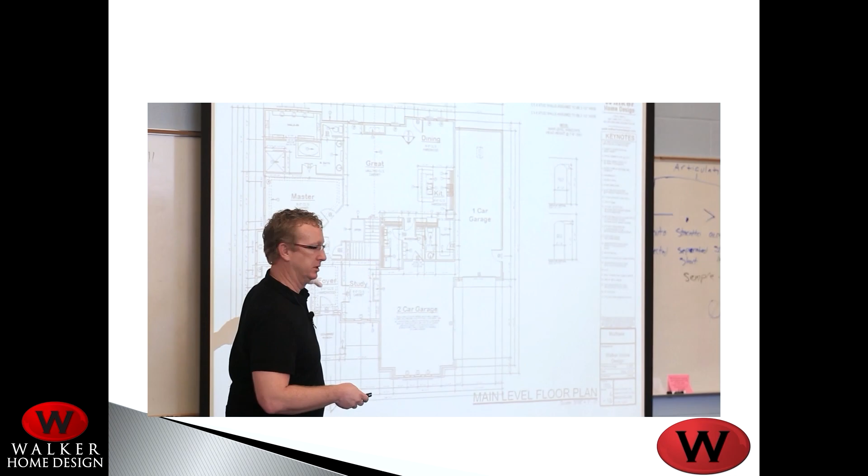That's a video of some of the homes we've done recently, different styles, different types, different locations, cities. You saw a few shots of me out there on job sites talking with subcontractors and builders. We're going to talk a little bit more about that in a moment.

Here's a little history. Sometimes people want to know where you came from, what your background is, what qualifies you to draw their $10 million house. So here's just a few statistics about our company, a little bit about myself. I designed over 4,000 homes, remodels, multifamily projects in almost 30 years of doing this professionally.

Our company, we try to be pretty picky about who we hire, so we've won tons of awards because we hire great people. If you're looking for a spot to work and you want to be with a cool team, we've won tons of awards. Here in Utah, we've won 9 Best of State, and 3 out of the last 4 years we've won Best of Salt Lake City, Best Architect, Best Interiors, People's Choice in the Parade of Homes, those kind of things.

Something else unique is I'm a homeowner and I've built my own homes that I live in. I've also grown up building homes with my dad and my grandpa. My grandpa started building homes back in the 1940s. I've developed land, taken horse property, turned it into 3-lot subdivisions, and learned a lot from that experience. And you can see some of the other things on there.

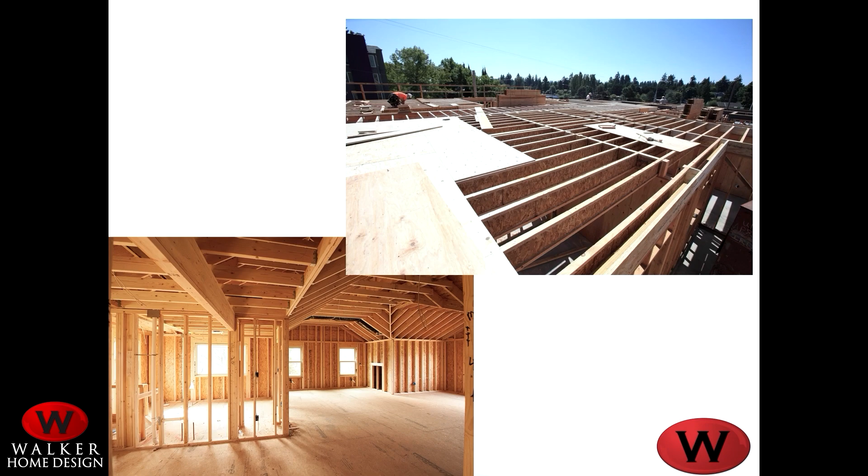So once I started my company, I said I've learned a lot by being out on job sites, so I would like to take my team out to job sites. We go out to job sites during framing, sometimes at the 4-way inspection, that's when the plumber, the electrician, the HVAC guys have all finished their work. We go back and see the guts of a house and how it all comes together.

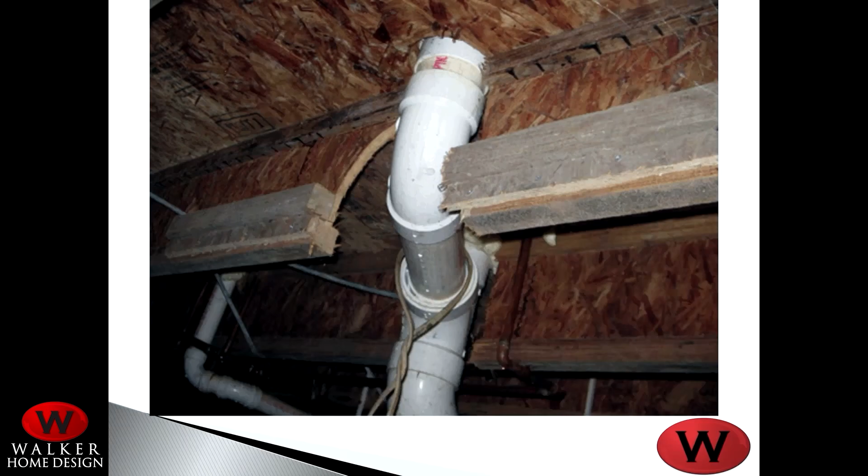And something we started noticing as we interviewed different trades was that this was one of the problems happening all the time: the framer leaves, the plumber comes in and he's setting tubs and toilets and showers, and he drills through a floor joist and he drills through a beam, and somebody's got to pay for that.

When the builder would go to the plumber and get mad at him, the plumber would say, well, the homeowner wants the tub or shower right here, so the drain's got to be in this location. So then he'd say, well, I got to blame somebody else, I'm going to go to the framer. He put the beam in the wrong spot. So he'd go to the framer, and the framer would say, well, I'm just laying out the floor joists like the engineer called. You'd see this finger pointing back and forth. Eventually somebody has to pay for it, and it's usually the homeowner, because the builder isn't going to take responsibility, and it becomes a line item on contingency for the homeowner.

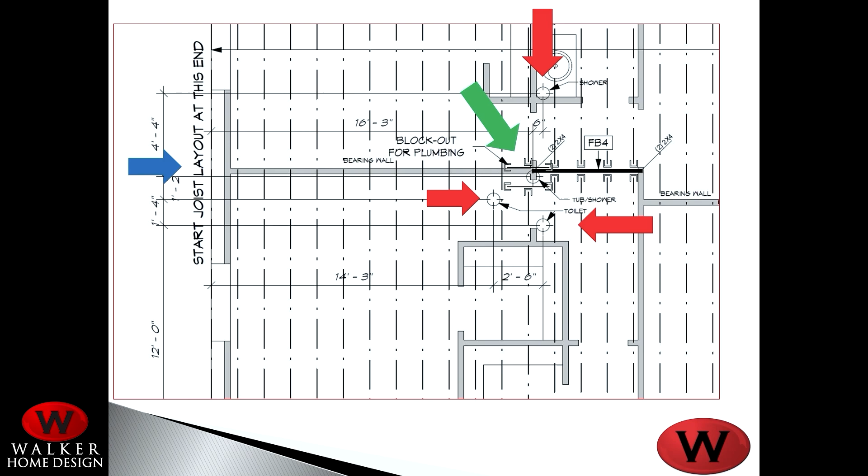Almost like you'd see in directions to build a spaceship with Lego. Builders came back and said this saves them anywhere from $1,000 to $5,000 on bigger homes in time, money, and labor. They said this is one of about 20 to 30 things they see on Walker's plans of thinking ahead, solving problems before they become issues on a job site. And that's why we like using Walker plans.

All right, so that's item number one that we feel like we're really good at Walker Home Design. Item number two is designing better floor plans. The way we do that is we ask a lot of questions. As a client comes into our office, we try not to make assumptions like, oh, you want a 3-car garage, 4 bedrooms, a dining room and a pantry. We ask people how they're going to use their space.

A lot of times I use the term, what's your pain? Usually as humans, we don't make a change in our life unless there's a pain or something's bugging us, and that's true with people that build houses. I'm going to build a new house because I have more kids and need more space, or I'm going to build a new house because I don't have as many kids at home and need a smaller space. Whatever that issue is, we try to find out how they're going to use their new space.

For example, in the garage, we ask our clients, how many cars do you have? What size are they? How much space do you need for storage in the garage? Do you work from home? Do you need a home office? Do clients come into that office? How much time do you spend in your kitchen? Are you a gourmet chef or do you do takeout? If you do cook a lot, how many people are in that kitchen with you, and do you need a bigger pantry? Do you entertain, do you have parties? For every aspect of the house, we go through this question and answer series so we know exactly how they're going to use the space and can get it designed correctly.

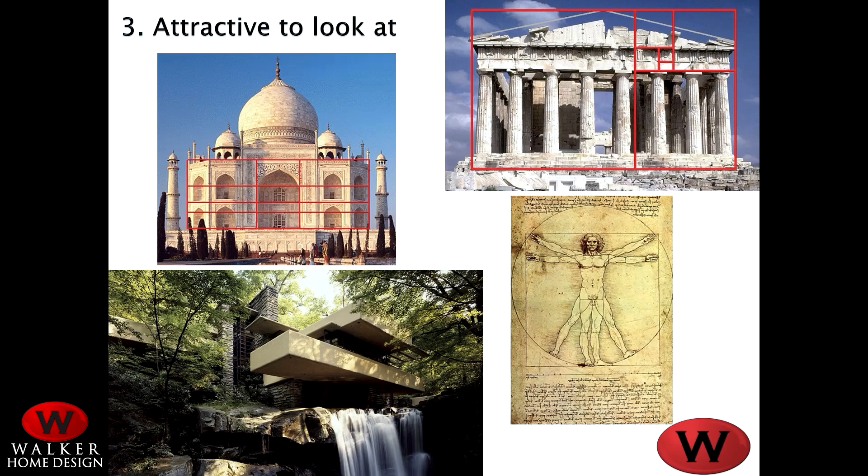You can kind of see it in these red lines on the Parthenon and the Taj Mahal. Frank Lloyd Wright used it in his architecture. You see this picture of Falling Water, which is a pretty famous home he did. It's also in Michelangelo and Leonardo da Vinci's art and their sculptures, all about proportions and ratios. So when we go to design a house, I actually still use grid paper or grid lines to help us design and follow those rules.

The fourth thing that we feel like we're really good at is giving back to our community. We work a lot with different charities. We've donated plans to Habitat for Humanity. Our office has actually built playhouses and donated those to Shriners Hospital. We've done remodel projects for a small charity called Little Miracles that helps single moms with kids remodel or improve their homes. But probably the biggest charity we've worked with over the last 20 to 30 years has been Make-A-Wish.

The way that we partner with them is we may have a home that's coming up to be in a parade of homes or something like that, and we want to do a themed room inside a client's house. So we'll partner with Utah Make-A-Wish and find a child that has already been granted their wish, and we will design a room that looks like their wish, kind of reinvented. During that parade, we'll usually get 8 to 10,000 people that come through, and we'll have a QR code or a donation jar, and we try to get each person that comes through that room to donate $1 back to Make-A-Wish.

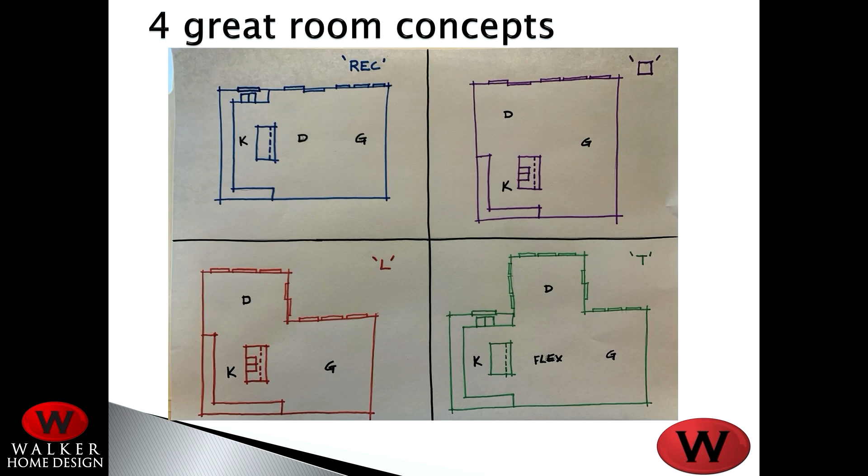So this particular client said, well, yeah, we've got a lot of needs, we want the best of everything. So I said, okay, let's go look at your property and see how this T shape is going to fit and maximize the value of your land.

So we went out to their property and we noticed something right off the bat. First of all, their lot was sloped. The back was high, the front was low, and the left side was high, and the right side was lower. So it not only sloped in one direction, it sloped in two directions on an angle.

The other thing was all of their views were off to one side of the property. So I said, here's something we should consider: what if we took that T shape and rotated it 90 degrees? So instead of your backyard being behind your house, your backyard was off to the side. You can see here highlighted in red is that T shape rotated, so all their windows were off to the right of that picture.

Then we started playing grown-up Tetris. I took the shapes of the other rooms based on the sizes they wanted, and we started mapping out where the rest of those rooms could go. Then I quickly sketched up what the outside could look like based on the photograph they first showed me. So this was our first rough bubble diagram.

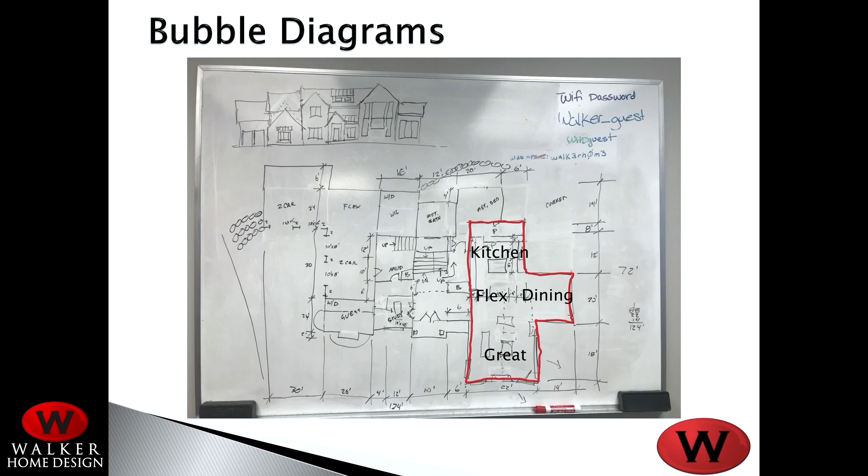The client said, okay, we like how this maps out, but how big is that house compared to our lot size? How does it fit on our property? So at the next meeting, we had their property drawn up. They actually bought two half-acre lots, and they said, we might want to sell this other lot someday, so let's put the house on one side and do all our landscaping on the other side. So that's how we mapped this out.

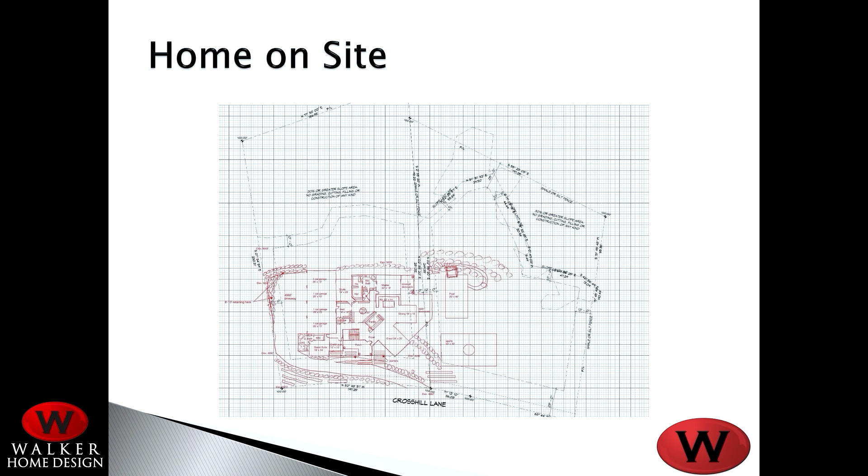Their house fit on one side. I'll do a blow up of it, and we sketched it out. You can see I did grid patterns, which helps me follow my rules of even numbers and the golden section when it comes time to doing the elevation.

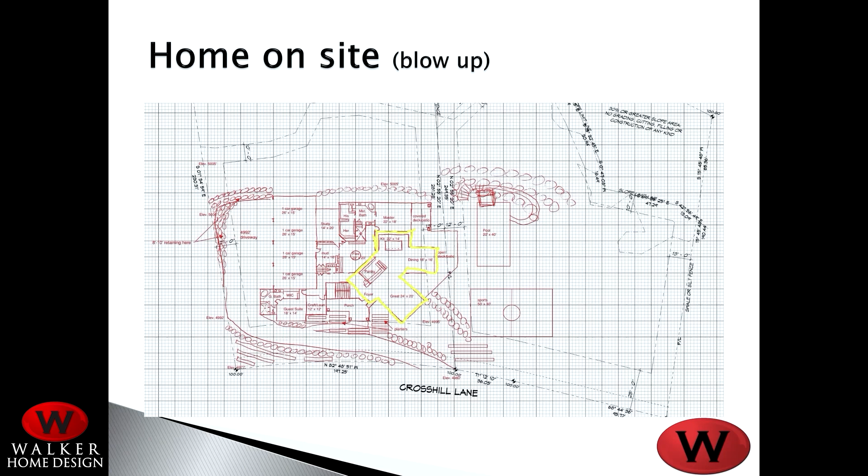Luckily the builder who was in the meeting - we invite the builders to every one of these meetings so they take ownership in this design process - chimed in and said, hey, if you're going to start doing angles like that, you need to add about 25% to your budget. The client said, well, why is that? And they said, well, do you remember how Jamie talked about the materials we use come in certain shapes and sizes? They're usually squares and rectangles and things like that.

Well, when you start doing angles on a house, you're going to start taking those rectangles and slicing triangles off of them. And those triangles aren't going to be able to be used, so they're going to go in the dumpster. So you need to budget about 25% to waste, basically. And they said, well, we'd rather use that money on our swimming pool and our sports court, so let's go back and keep everything squared up.

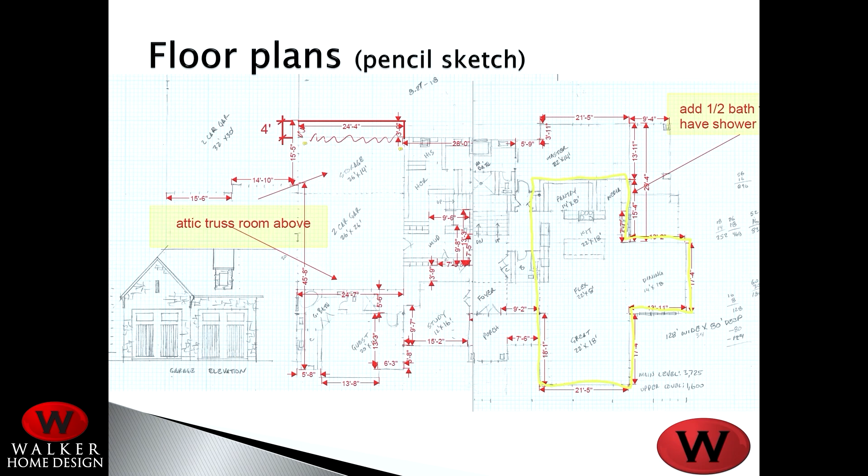So at the following meeting, we went back to the drawing board and restarted the process. You can see highlighted in yellow is that T shape, and then you can see the sizes and shapes of the other rooms. By this time, we had a topographical map that showed the slope of their property, so I was able to resketch the outside of their house to fit that slope.

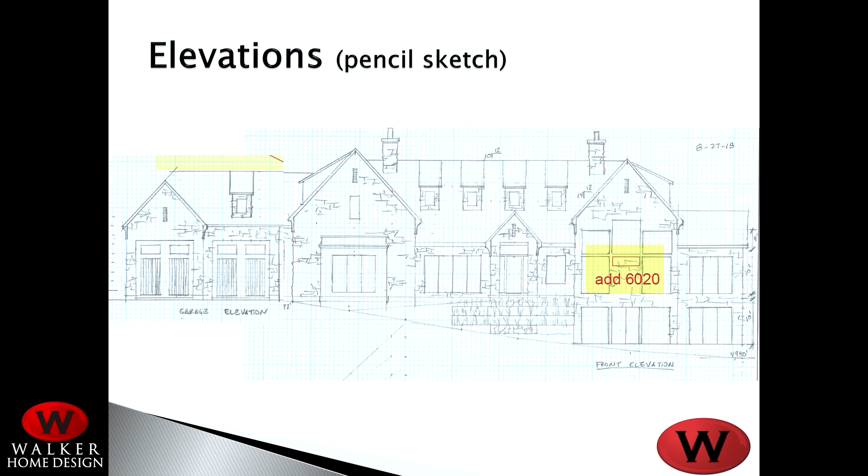Once they saw the floor plan and this elevation, they said, okay, we love this. The builder said it meets budget. Let's go ahead and move forward. So the client said, all right, let's do it.

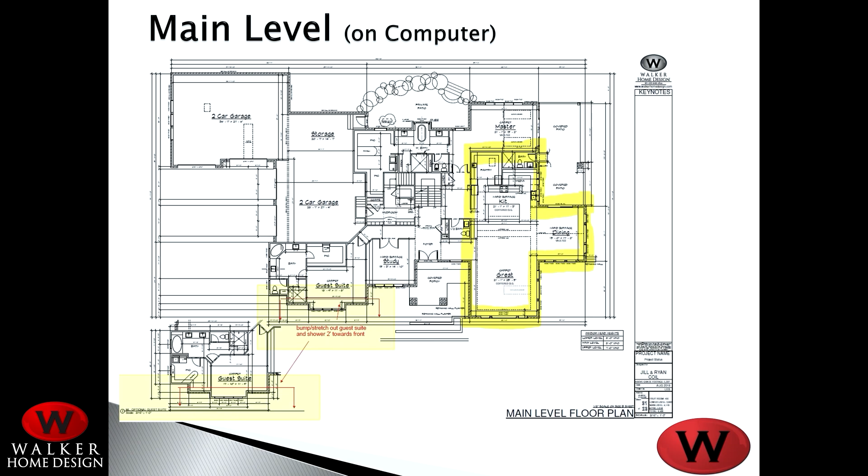So at the next meeting, which typically is a week to two weeks later, we had their floor plans on the computer. You can see I've highlighted the T in yellow, so you can follow that through this journey. They made a few changes to the floor plan. They had a mother-in-law suite, and they went back and forth on different designs we wanted to do for that. We also did their upstairs - they had an attic room over the garage. They didn't make a lot of changes to that.

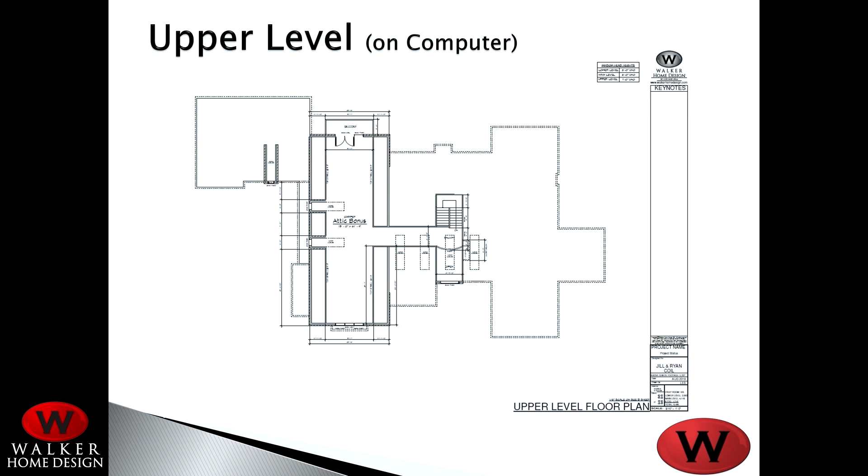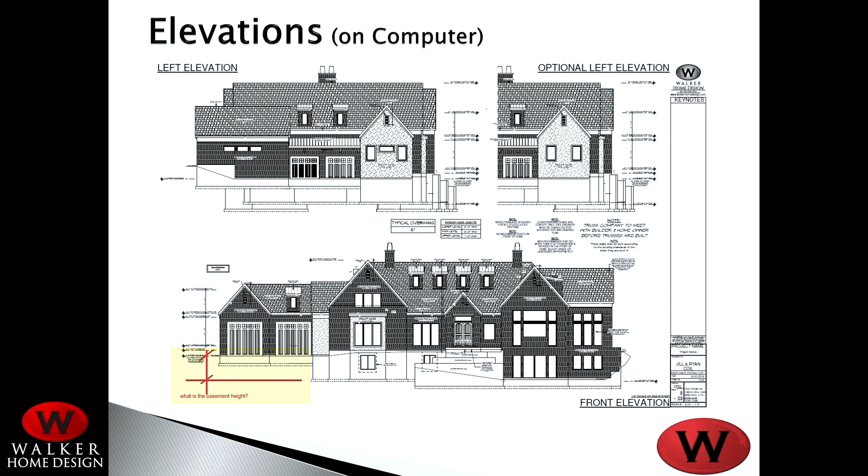After this meeting, they said, okay, let's go to the next step, which is designing the exterior and the basement. So at this meeting, about two weeks later, we had their exterior drawn up, and they made a few changes to this. Then we did their basement - they made a few changes to their theater. We also email our clients a 3D copy of the plan.

They can download a viewer and spin this around on their home computer to see how that looks. We also check the square footage, so the builder can chime in and say your square footage is good, we're still on track for budget, or hey, we might want to cut back or modify things.

The clients can look at room sizes and say we need a little more space. I often tell clients to measure existing rooms in their house to compare to the new rooms, to see if a room is too big or too small, or check an island size, for example.

Once they approve the square footage, the elevations, and the floor plans, we have the client sign off an approval that approves the plans to go to engineering. It takes about 3 to 4 weeks for our engineers to get everything back and forth with our drafting team, and then we have one more final meeting.

At this meeting we pull out the full set of plans and go through a checklist of 5 to 10 items off to the side of every sheet that's going to the city. We have the client sign off on it, the builder sign off on it, and one of our design experts sign off on it. That virtually eliminates any callbacks from the builder or homeowner with problems out on the job site.

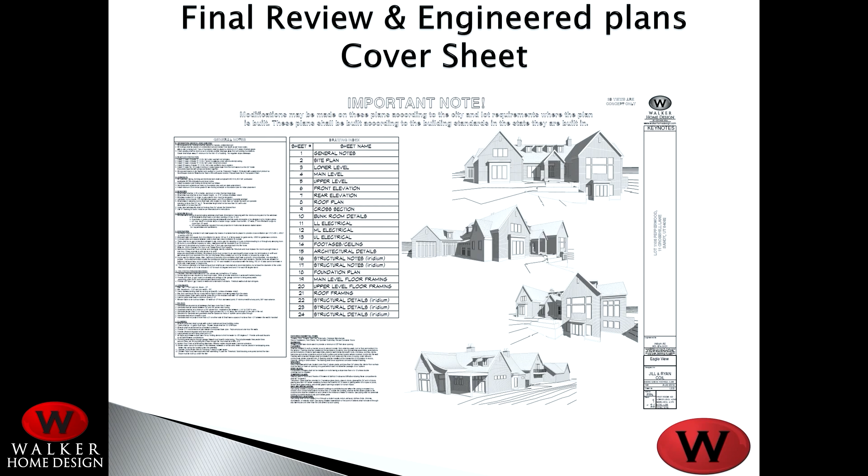So here's what a full set of plans generally looks like. We have a cover sheet with 3D drawings, the site plan, and the lower level with door and window schedules.

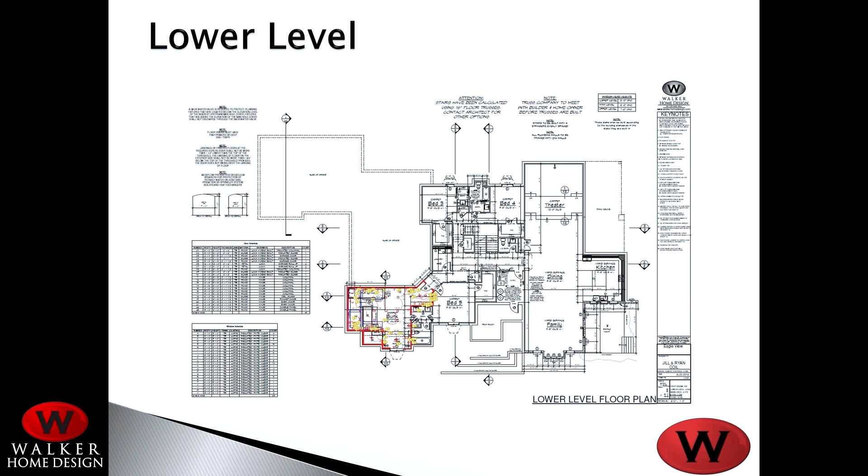You can see the client made a few more changes here at this final meeting, but the nice thing is we don't get the plans stamped until after this meeting, so generally it doesn't add any extra cost to our client.

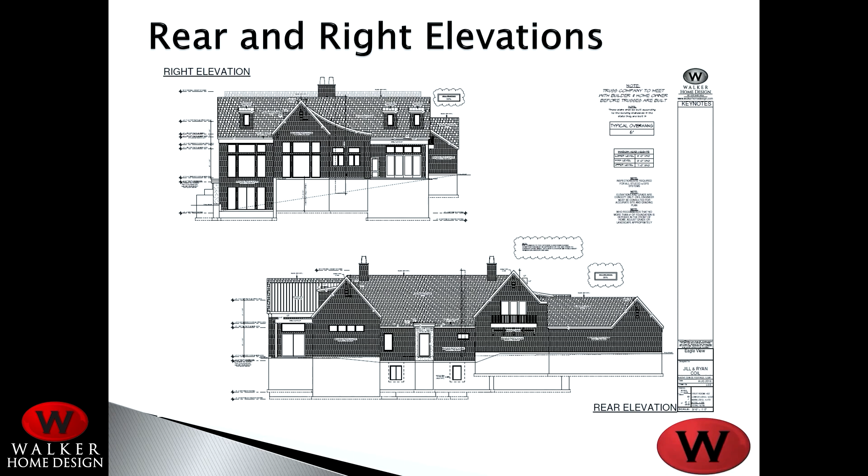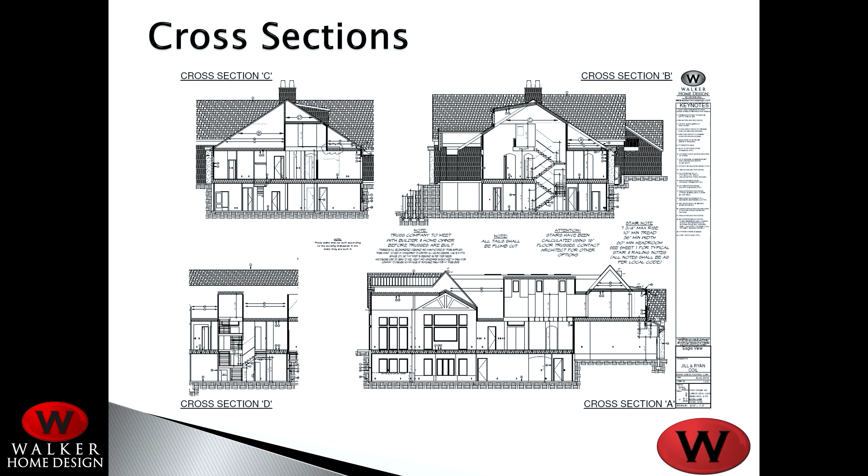We got the main floor, the upper level, all the exteriors. We even do a roof drainage plan that verifies we won't have any snow or water issues down the road, and cross sections, which really tell the best story on how the home gets built.

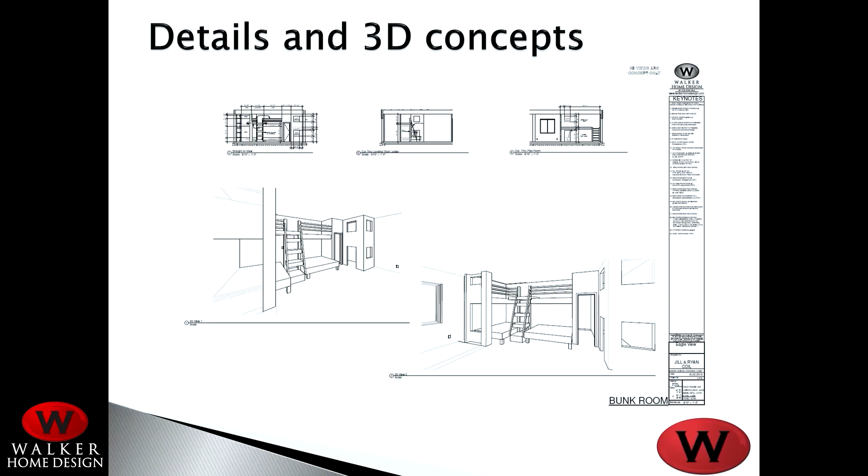We can even do 3D interiors. We can do black and white, which is pretty simple if clients just want a quick view of what things look like, or we can even do color walkthroughs, interior or exterior.

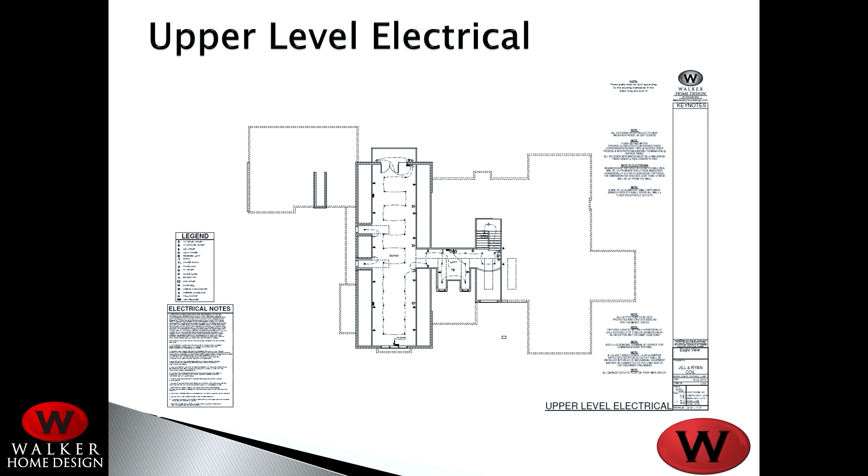We also have separate meetings for flooring, electrical, and ceiling details. Here's the electrical plans. We check the square footages one more time just to make sure we're on track and on budget.

One of the unique things we do is the truss layouts. A lot of architects avoid this, but we want our team to understand how the roof's going to go together. This tells a good story to the truss manufacturer because they'll know exactly what our intentions are for the roof. We also have a disclaimer in the bottom middle requesting that the builder, the homeowner, and the truss company meet before these are built.

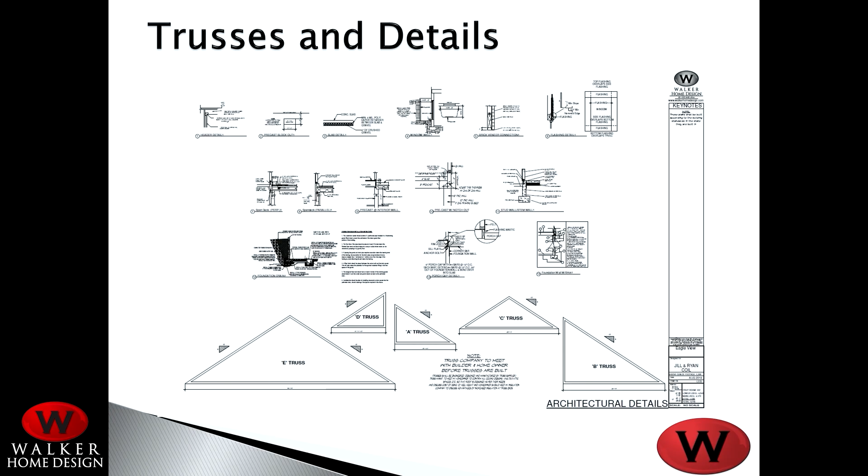We had an experience one time doing a remodel back in Virginia. We sent the plans to the builder, and the truss company saw our trusses and said, oh, they've already designed the trusses, we don't need to go out and measure the house, we'll just build them as drawn. Well, the foundation company poured the foundation about 4 inches too big, and the truss company never came out to field verify those measurements, so the trusses were built wrong. They had to go back and reorder trusses, which was a combination of the builder and the truss company messing that one up.

We had another situation where a builder didn't supervise the superintendent, and the same kind of thing happened. They ordered trusses without field verifying or getting snow loads accurate, and the builder really messed up and ordered the wrong trusses, and they didn't catch it till the 4-way inspection. They already had piping and electrical in and all of that. The builder ended up, I think he went bankrupt and had to change his name to avoid issues there. So make sure you follow the directions on the plans.

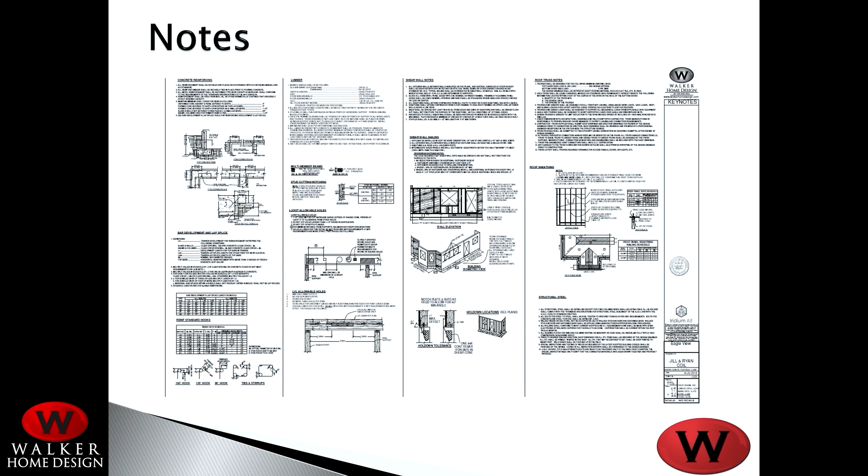The other drawings we include are engineering details, notes, footing and foundation, floor framing, main floor, upper floor framing, and roof framing. One of the other cool things we police when it comes to engineering is we follow certain rules in our office where we try to line up bearing walls, number one. If you can't get a bearing wall to carry a load, then we try to get it held up with a girder truss in the roof.

Now, if a girder truss doesn't hold a load, then we put headers and beams in. Every house has to have some type of header or beam, but we try to follow that order of importance. And when we get to beams, we tell our engineers that those beams need to be wood and need to be 12 inches or less.

In some cases, they need a bigger beam than a 12-inch wood beam, so they'll do steel beams. But on our plans, we require the engineer to give us two options, a wood and a steel option, so the builder can avoid having to get a letter from the engineer. It's already been thought through up front that way. There's a few other things too, and builders have told us those kind of things save thousands when they go to build.

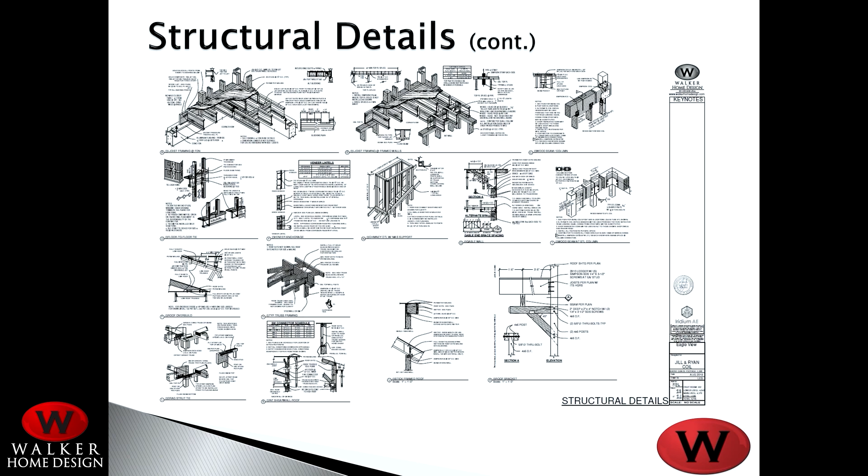So all of those structural details are included. That's pretty much a full set of plans. So in a nutshell, our process on a custom house is we have our initial meeting, making sure we're a good fit for the client or the builder.

Then we do line drawings at the following meeting. Once those are approved, we get the floor plans on the computer. Once those are approved, we do the elevations and the basement. Once those are approved, we go into engineering, and usually anywhere from 2 to 4 weeks later we get the plans back and have one more final meeting. Sometimes in between, while it's at the engineer, we'll do a flooring, ceiling, and electrical meeting. Then the plans are ready to be stamped.

Now, sometimes people are in a hurry. Our normal process might take anywhere from 6 to 12 weeks, but sometimes people are in a hurry. They hear that rates are going up and they want to close on a lot, or maybe do a 1031 exchange on a property and need an appraisal quick. So we have rush options available where we charge an additional fee, and we've done 8,000 square foot custom homes from the time I pencil sketch it to the time it's stamped and out the door in about 3 weeks.

What we do with that is we meet twice a week. I'll have one of my draftsmen to work nights and weekends, and we give them a bonus. We also give our structural engineers a bonus to put us in front of the line and kick things through a little quicker. If it's a stock plan, the process just goes a little bit quicker because we're modifying an existing plan. And that's pretty much the process.